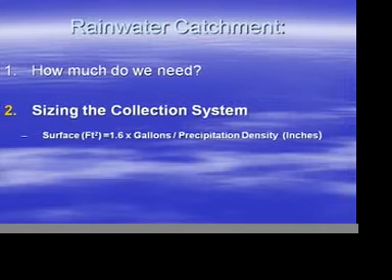What we don't show in this thing is the time element, whether that's per week, per month, or per year. And that basically is the engineering judgment that you'll need to find out. Again, keeping in mind, as we said, the rainy season may not be tourist season. As far as the roof itself, that is the horizontal projection of the roof. If you have a pitched roof, it's not the combined surfaces. The thought being that rain kind of falls straight down.

Materials to be used. A lot of the rubber roofing things tend to be NSF approved, and you can basically take the water off without a whole lot of problems, providing that you keep your surfaces clean. If you're talking shingled roofs, asphalt shingles, they're not recommended for potable water. If you do use it for non-potable, then the issue becomes filtering out the grit and the sand.

If you're talking wood shingled roofs, the danger there is that sometimes they're treated with an antimicrobial thing to keep the mold from growing, which may not be good for your plants. So you need to pay attention to what you've got. Generally speaking, a metal roof is good, particularly if it's painted with an NSF coated paint.

Cleanable, non-contaminated surface. As somebody pointed out, and I'll come back to later, the rainwater itself is not the problem. The problem tends to be your collection surface. So it basically needs to be something that is easily cleaned and maintained. Somebody mentioned earlier that the problem with rainwater systems is much like a swimming pool, much like a well. It's on the onus of the owner to maintain it.

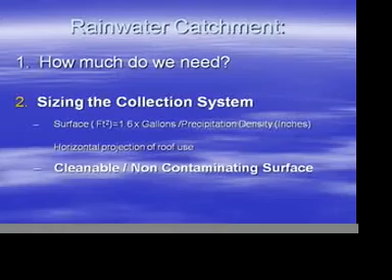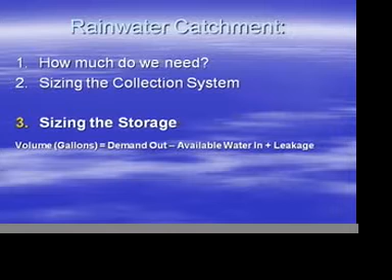Next variable is sizing the volume. The volume becomes basically the demand out minus available water in, and then plus the leakage factor that you have. ARCSA has a very nice methodology that you can download at no cost off their website. And what this does is it allows you to kind of do a little bit of iteration.

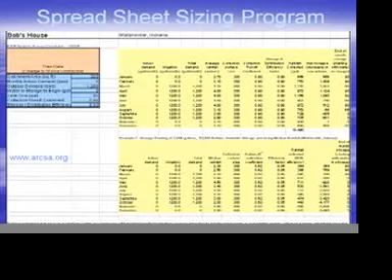Okay, you configure your square footage, and this represents the roof of my garage. We have estimated the demand is basically for a gardening use, so I just made a swag at what it'd take to water my tomatoes. Putting in a storage gallon, what I found out was that the cheaper 55-gallon drum doesn't work, so we put in a 90-gallon, and then sure enough, it basically runs out right about where it predicts here.

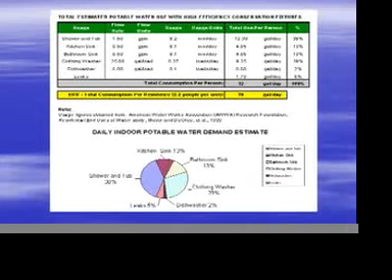Now, you see I've got two columns. One is the average rain density, and the other is the median rain density. So a program like this allows you to do some sensitivity analysis. Maybe you want to put in the driest month just to find out the impact of your collection area and your storage, just what sort of interaction that'll play as far as your situation goes.

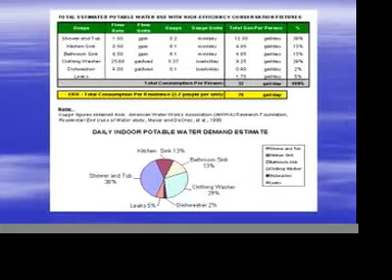System design techniques. Again, once we get our system over here, we kind of qualify what part of the design wants to be potable versus non-potable. This is a typical design, and this is something we picked up from the Germans. It has a couple of interesting things about it. First of all, our first concern would be to take the leaves and the debris off the roof. They have a filter, and there's a variation of this. This is basically what we would call a medium capacity filter.

It's manufactured by a company called WISY, and is now being represented by J.R. Smith here in the United States. Basically what that does is it acts as a pre-filter. It allows all the debris to come off the roof before the good water then goes into your tank. Now there's variations of this, and a lot of them are kind of site-specific as to what you actually need. It may well be that in parts of Indiana, all you need is basically a leaf separator.

If you have something on the West Coast, I'm told that tree pollen, when it gets a little wet, just makes kind of a goo and will plug things up. In that case, you may want to have a little bit longer period of time where the water is wasted. Typically, you want to waste the first 10 gallons or the first 20 minutes of rain, the larger of the two quantities. As the water comes in, it goes through this thing, and then comes out and down into the tank.

What's recommended is what they call quiescent flow. Rather than just slosh the water in and stir up the sediment in the bottom and aerate everything, they like to bring the water in as gently as they can at the bottom of the tank. And then as it fills up on the far side, it kind of bubbles. Anything floating is then pushed over to the overflow. And the overflow skimmer will basically take care of anything that is accumulating at the top.

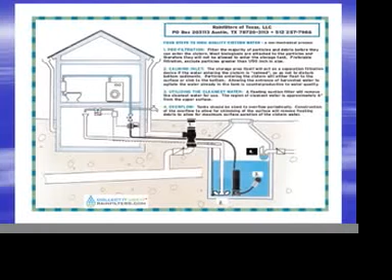For the pump, they have a lot of variable speed pumps that are controlled to maintain static pressure in your system, or you can go to a standard well type situation where you pressurize into a pressure tank. It goes into your system. Here you may have, if it's available, a manual fill. In Australia, there's a company called Davey Pump with a product called Rainbank that works in concert with your tank. When the tank goes dry, it will automatically flip over to what they call mains water. And then it goes into your facility there.